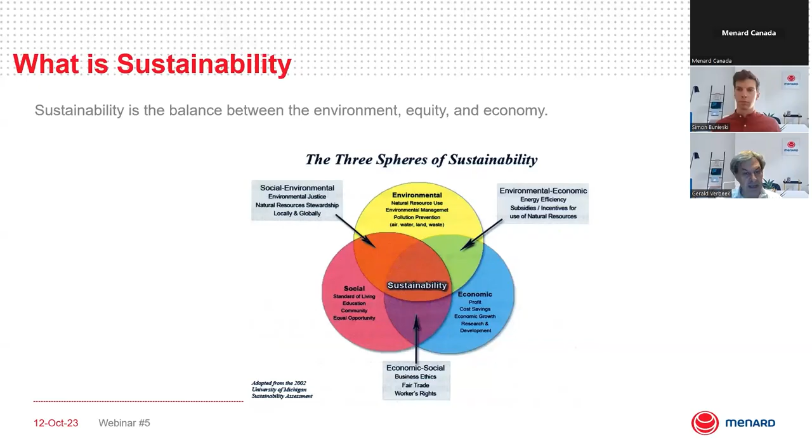To simplify it a little bit, you see that basically here you have the environmental protection, the social aspects, the economic aspects, and where those three aspects intersect, that is where you have sustainability. That is where you have a sustainable development going on.

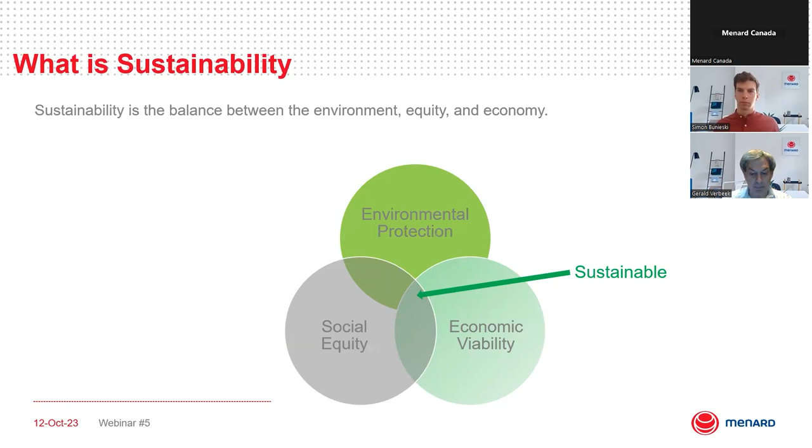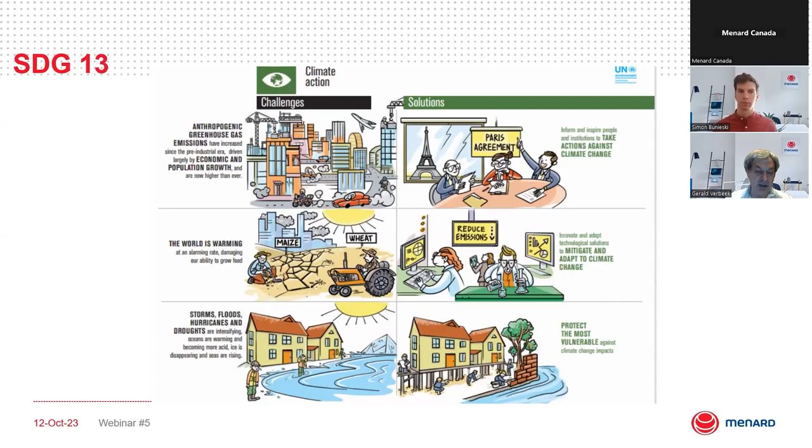That is why the Paris Agreement basically said, okay, we need to do something about those emissions to at least minimize the effects. I realize full well, and that's what I said at the very beginning, that there is no consensus among you as attendees, but I have to take the world at large, that what we're doing has an effect on climate.

Some people may say that the emissions really don't affect climate, that the reason you have climatological changes has nothing to do with what we're doing on Earth as human beings. So there are pros and cons, and I'm not here to try to convince you for one reason or the other.

But most of us, as you saw earlier at the results of the polls, are engineers. And what I would like you to do is accept that we may disagree, may have different opinions, but at the same time look at some data. As engineers, we always like correlations, and when we have a good correlation, we start to believe in this whole thing.

So let's look at the carbon dioxide levels in air going down about 800,000 years. What you can do with taking ice cores is analyze what the CO2 content in the air has been. You see that for the longest time, that varied somewhere between 180 and 300 parts per million. So yes, CO2 levels in the atmosphere change rather dramatically, 180 to 300 is about a factor of 2.

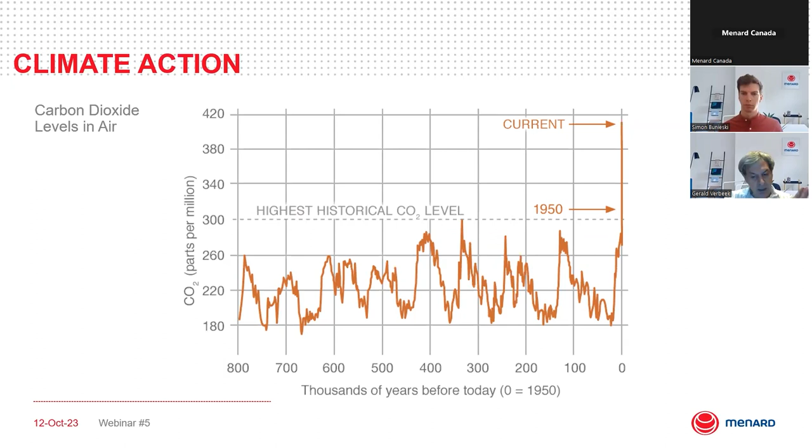And now we are in a period where we are in uncharted territories when it comes to CO2 levels. And it may also indicate that we're in uncharted territories when it comes to temperatures.

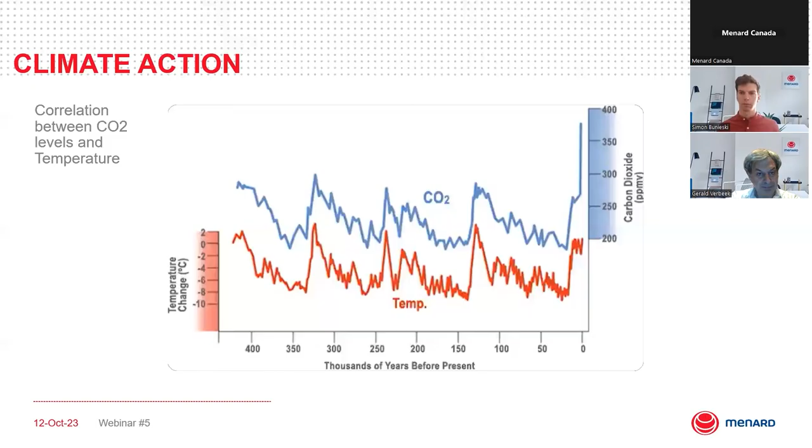Does it affect us? Well, when you look at what happened this year in Canada, we have had a tremendous amount of forest fires. Those forest fires were basically because of the drought conditions throughout Canada, which were a result of the climate action.

Here in the United States, we've had tremendous high temperatures in large parts of the country. But we also have seen that the results of the forest fires in Canada, the smoke and the particles in the air that came south across the border into the United States, affected us here in the United States as well. And it implies again that what happens in one country has an effect in another country.

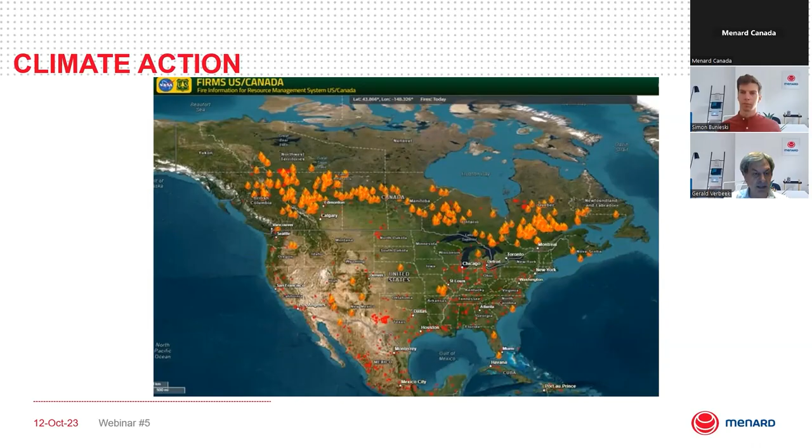And that's where I mentioned at the beginning that I was a Dutchman, because obviously, as I explained to you, the climate in Holland is largely affected by something that happens far, far away. So climate action is something that we, at least as engineers, should take seriously because of the correlation between the CO2 content and the temperature on Earth.

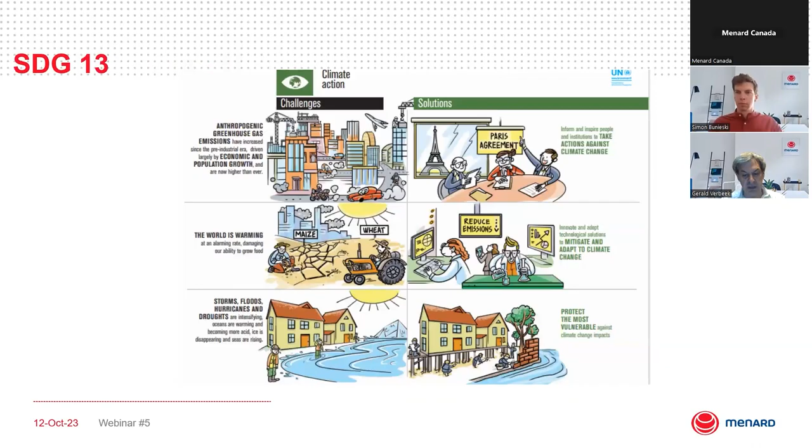When we look at this, you may wonder, of course CO2 content affects the temperature of the globe, but why would we do something about that in our industry? Why is it important that the construction industry is involved? What you see is that about 11% of the CO2 emissions come from building materials and construction. So our industry plays a major role in creating emissions into the atmosphere of CO2 and other greenhouse gases.

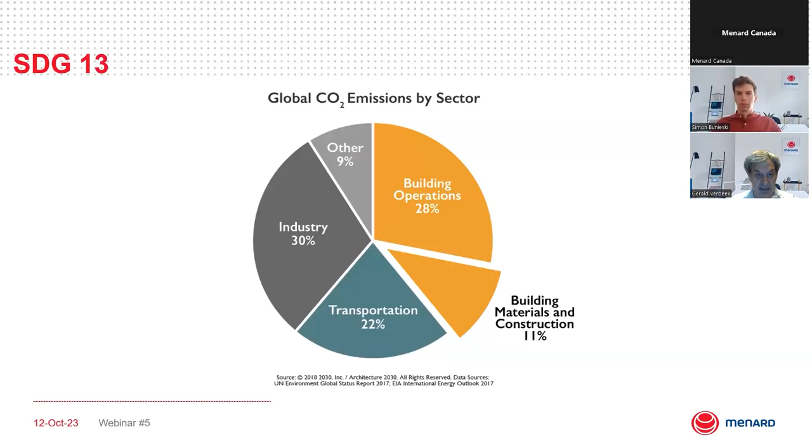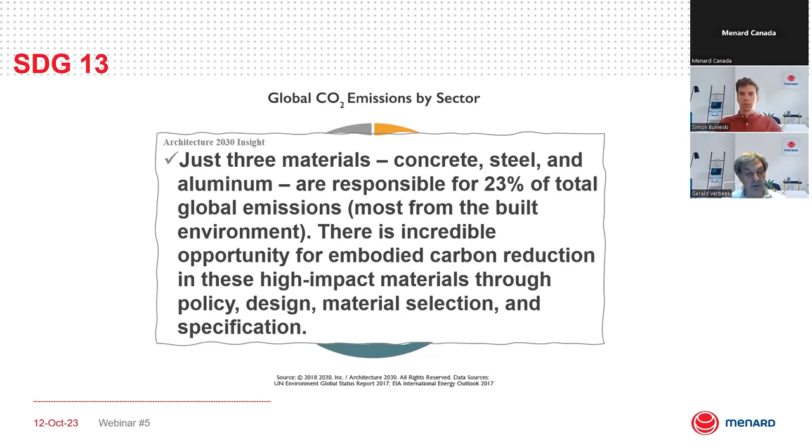You can go even one step further when you look at three materials: concrete, steel, and aluminum. They're responsible for about 23% of global emissions. Those are materials we use day in, day out in our industry. Foundations are often concrete piles or steel piles, and we have rebar, so those materials play a major role in creating emissions. That's why it's such an opportunity in our industry - not only because we generate a large percentage of emissions, but also because of the materials we use. If we start using them less and see an improvement, we can really affect what's happening.

So let's look a little bit at where we are. Here you see the building life cycle. It starts on the bottom left-hand side, where we start creating products that we then use to build a structure. Then we use that structure, and at the end of its lifetime we also need to make sure the structure is either destroyed, abandoned, or taken apart - whatever you want to call it. But there's this end-of-life stage, and hopefully we're able to recycle quite a few of the products.

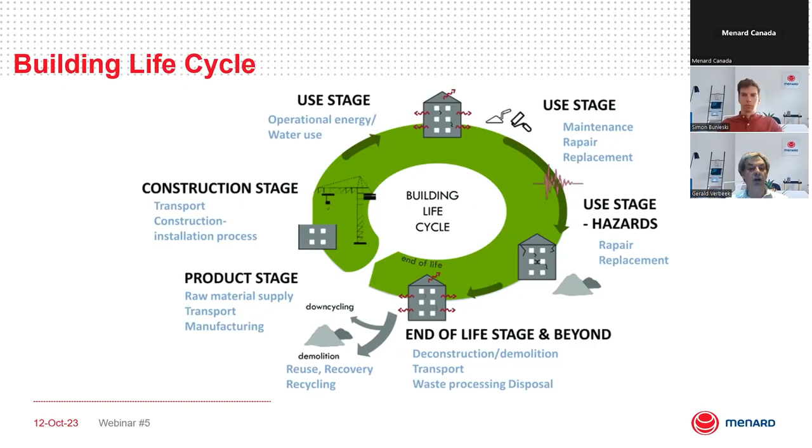Quite a few people would say, well, if we recycle what we used, we're doing pretty well. Up to a point that's true, but it would be even better if we avoid building, or if we do build, reduce the amount of what we're constructing, or substitute it with things that are more effective, more efficient, more sustainable. And if we really can't do any of that, we can compensate by taking other actions, for instance planting trees or doing other environmentally sound things.

For foundations, how can we do that? Let me give you a few examples. If we have a building and we reuse the foundation, we basically avoid having to build a new foundation. That's why, as chair of the conference on foundation decarbonization and reuse, that's something I really want to advocate.

But if we do have to build a foundation, if we use a more elaborate testing program, we can increase the resistance factors and therefore reduce the size of the foundations, coming up with a more sustainable solution. Or, what we're going to talk about today, instead of putting concrete and steel in the ground, we can do ground improvement and substitute that material for something more sustainable. So there are all kinds of things that at first sight you might think we cannot do in our industry, but we can really apply them throughout what we're doing.

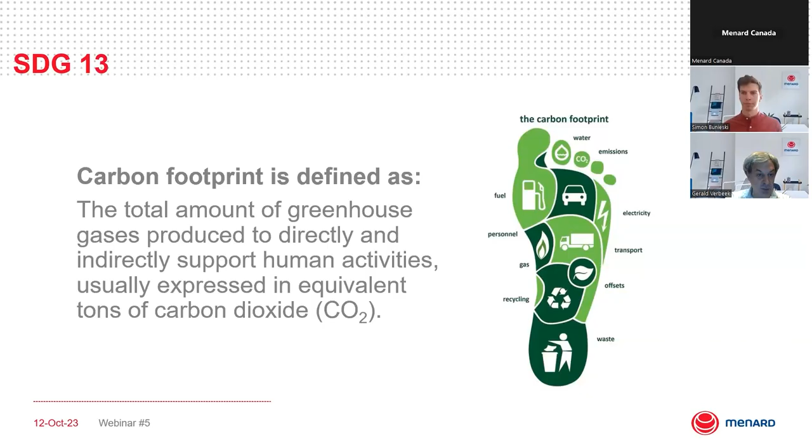The question then is, what is the carbon footprint of our industry? And if you go and look at that, the easy solution is a tool that we have developed together with EFFC and DFI, the carbon calculator.

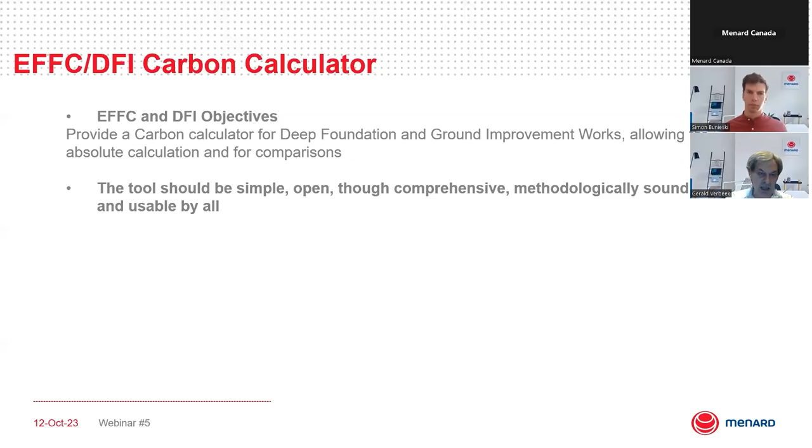It's a tool that is very simple, basically an open tool. You can use it, you can download it, as I showed you. It's a spreadsheet where you can enter all your data and get an indication of what your emissions are. And we take those emissions from all activities, from going to the job site with our staff, bringing equipment to the job site, creating the materials that we need there, and then putting the whole project together.

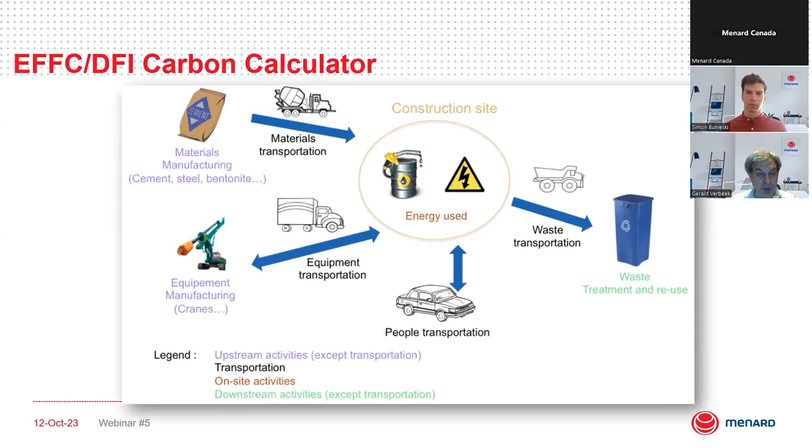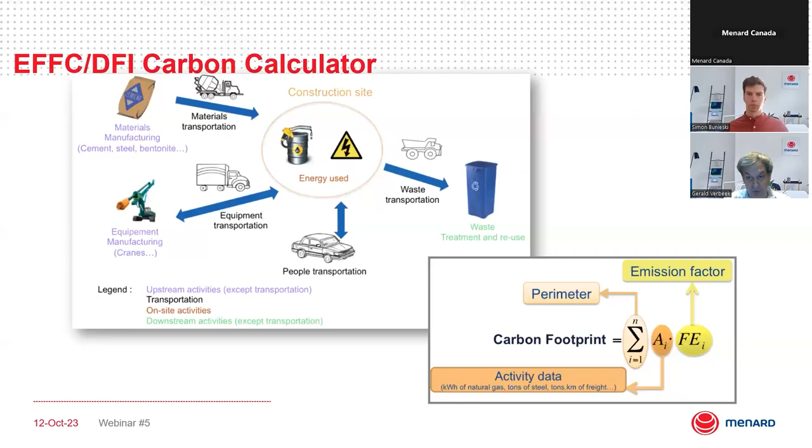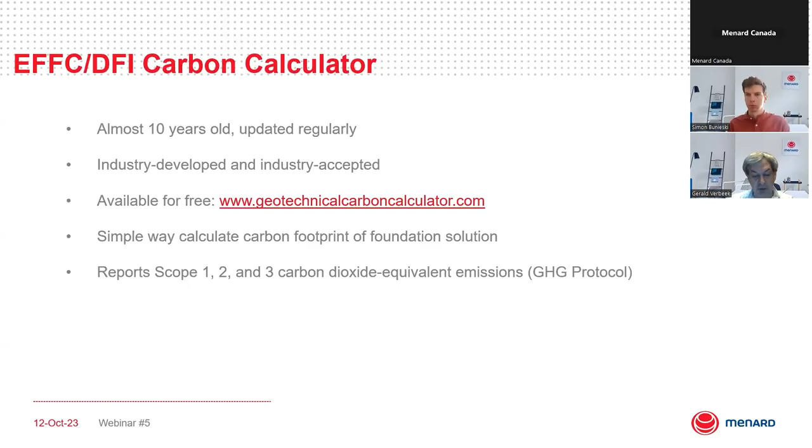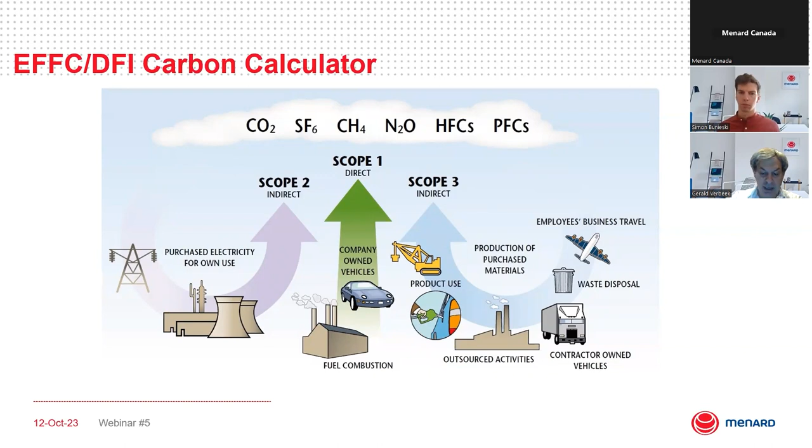What that carbon calculator allows you to do is come up with the complete scope of emissions: scope 1, 2, and 3. Scope 1 is basically the fuel consumption to bring staff to a job site. Scope 2 is the electricity we're using and other power applied on the site. And then scope 3, by far the largest part, is the emissions caused by generating the materials and putting everything together on the job site. That's what we need to focus on, because for most in our industry, the scope 3 contributions far outweigh scope 1 and scope 2.

But there's something else we need to look at. What you see here is the results of some analysis we've done with the carbon calculator, showing all kinds of different foundation types. We're not saying every foundation type has the same carbon emission level, but we're showing the contribution for the different foundation types, where it comes from materials, waste, or transport. You basically see that for most foundation types, the material component, the brownish part, is by far the largest component. So if we know what that material component is, and if we can reduce it, we automatically reduce the total emissions.

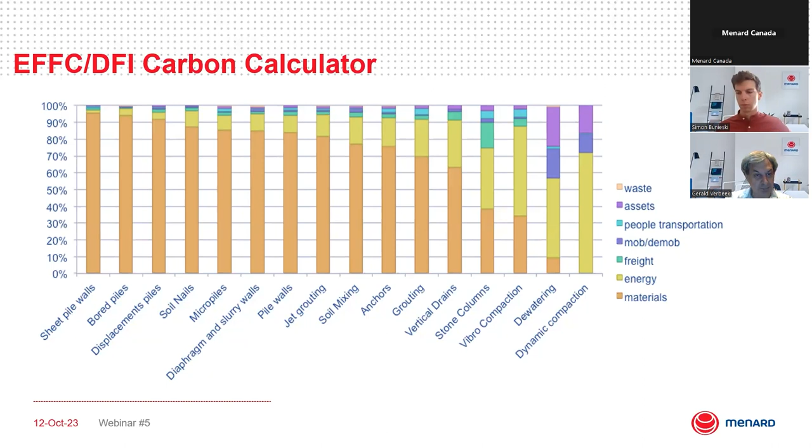But when you go farther to the right-hand side and come to ground improvement, you suddenly start seeing that since we don't add many materials, the situation changes quite drastically. Therefore, it's important that you understand the impact of a type of foundation. If you're using a concrete pile, that has a completely different impact than a ground improvement, and that's, after all, the topic of this presentation.

But also, I want to emphasize it's not just the Green Deal we're talking about. Last year, I moderated a webinar with DFI on sustainability, and I invited four executives of North American companies to participate and give their views on sustainability. One of those people on the panel was Seth Pearlman, CEO of Menard North America. He basically indicated that, listen, it's all fine if we're talking about sustainability, but unless it's a financial benefit, we really are not going to get anybody to step up to this whole thing.

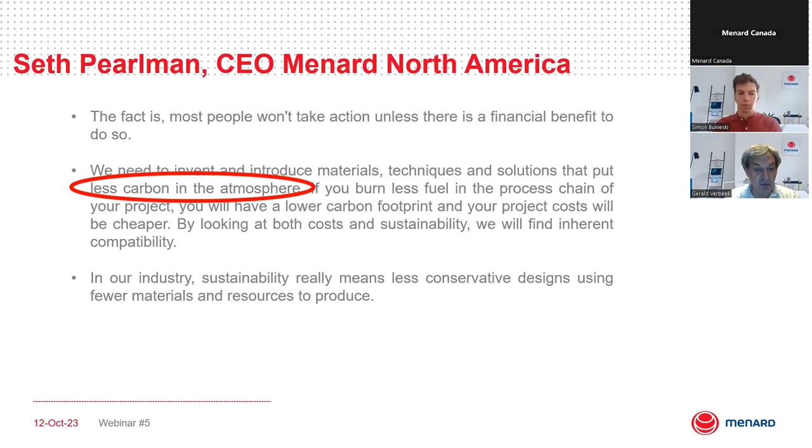At the same time, we need to use techniques and solutions that put less carbon in the atmosphere, as I pointed out earlier. One of the things this really means is that sustainability means using less conservative designs, using fewer materials and resources to produce. And what does this mean? Now, what is the next step? Well, that's to try something new. And I'll give you one example.

This is a case study that was put together for the DFI magazine not too long ago by Katie Costello from Isherwood. I'm more than happy to use that example, where we talk about the construction of a station in Toronto.

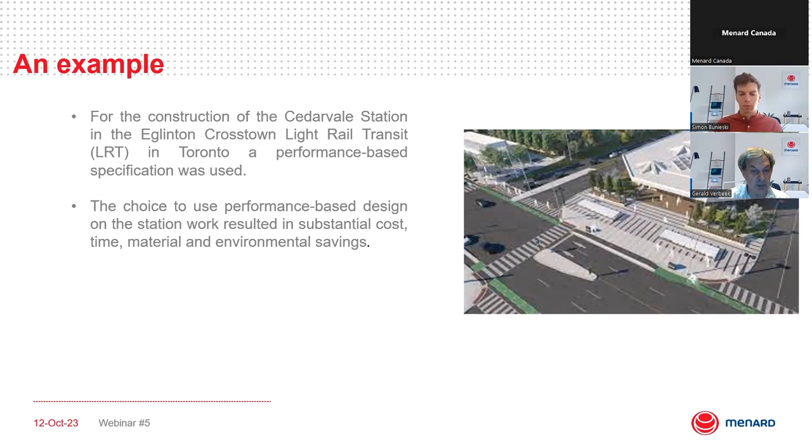The specification was not specifically defining what had to happen, but they gave a performance-based specification, which allowed the contractor to optimize the design to come up with a more sustainable solution for that production.

Using a carbon calculator, we came up with the emissions or the reduction in emissions, and then to clarify that impact, we used another tool from the Environmental Protection Agency in the United States: the greenhouse gas equivalency calculator. That basically allows you to come up with a very simple equivalent, because when we're talking about tons of CO2 emission reduction or addition, it's very hard to figure out what it really means and how it equates. With this calculator, you can come up with something like that.

In this project, the station in Toronto, we could reduce the emissions by 530 tons of CO2. And it basically shows you what the equivalent is — the energy that is used for 67 homes in one year.

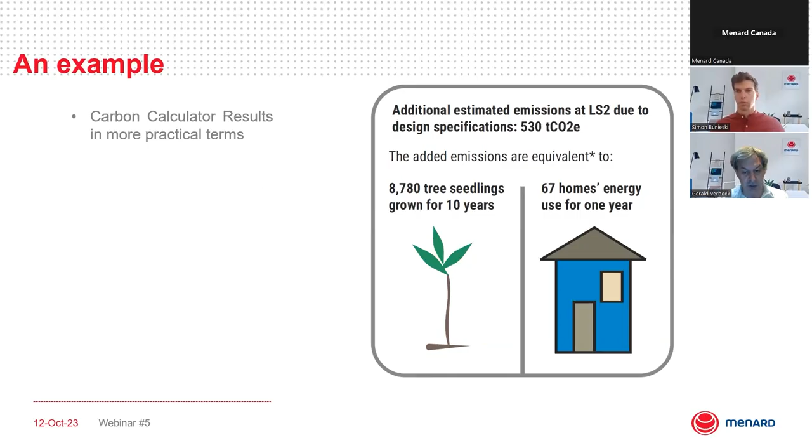With that, we can really show as an industry that we can do something. We can reduce the amount of materials, therefore reduce the carbon emissions, therefore have a positive impact on the temperature of the Earth, but we can also present it in terms that are more easily understood by our audience. So with that, I think I've given you an introduction of what sustainability is all about, why it makes sense, and Simon will take it from here.

If you cannot reduce, then substitute. If you cannot substitute, then really go compensate. That's really the last resort that you have. But the approach is we don't want to be at compensate first — we want to just go step by step.

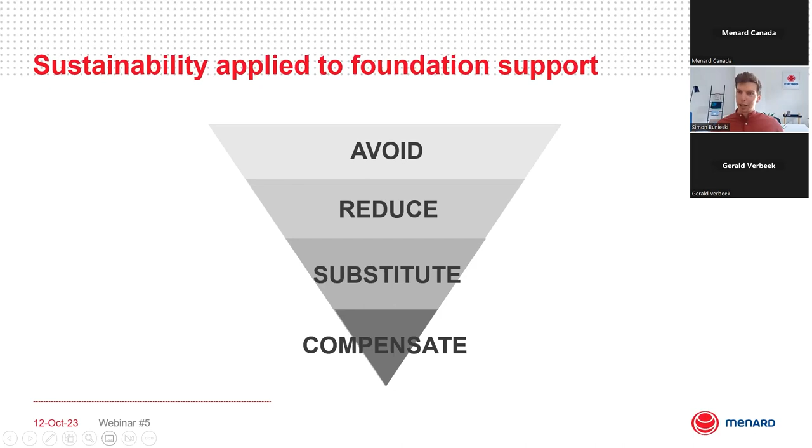The approach I wanted to share with you today is to take different points of view from different stakeholders on a construction project and see what it means in practice. So if you look at it as an owner: avoid, obviously, means avoid construction — do not build, which is not always possible. If you want to reduce it, you should see it as build only what is necessary.

Substitute is, you may want at some point revisit some architectural choices if you have the ability to, because some panels or specific materials you choose may not be the least carbon intensive — there could be some less carbon intensive options. If you cannot, then compensate — plant trees. This is more of a side note than a real action, something we want to avoid as much as possible and go with the further options instead.

As a consultant or as an engineer: avoid. What can we avoid except loads? No load is obviously the best approach. If we cannot, then let's lower the design load.

Sometimes we see that some loads are maybe overestimated because the project is very early or because there are a lot of unknowns. Maybe we should take the time to go more in-depth and try to lower these values, because that will have a consequence on all the other trades involved in the project.

Substitute is about specifying lower carbon intensive alternates to be used on the project, because at that level of involvement there's the possibility to provide clear specification on substitution. Plant trees, again, is more of a running topic than anything else.

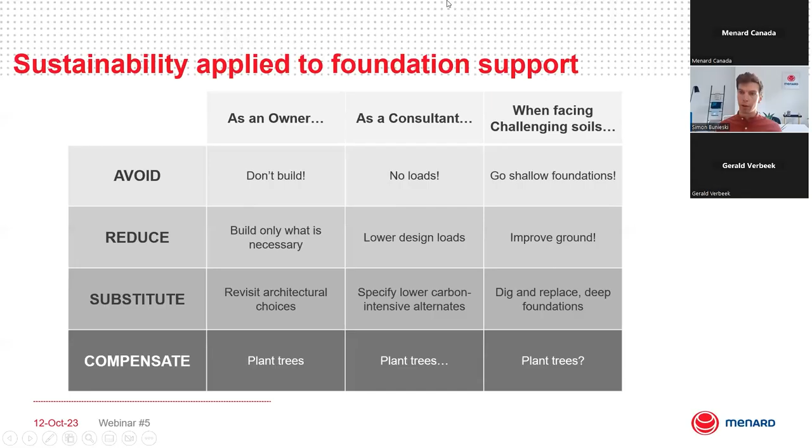If you want to reduce challenging soils, what does it mean? You need to improve them — that's what we call ground improvement. If you cannot reduce this challenging soil, then you have to substitute them, with options like digging and replacing the soil, or substituting with concrete that you don't design around — and that would be deep foundations.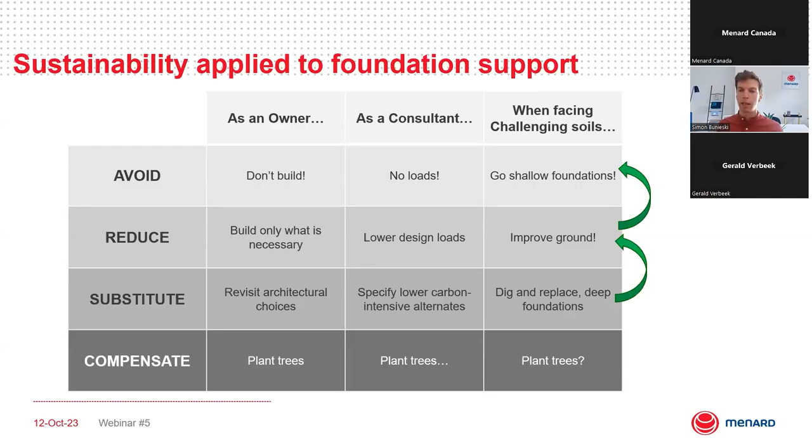So that's what we wanted to elaborate on, and then say, if we go for more value engineering, then there would be less ton CO2 equivalent. And how do we measure that on a ground improvement project?

Bill mentioned the EFFC DFI carbon calculator, which is a great tool we've been using for the last couple of years, and keep using to compute absolute values of ton CO2 equivalent, the metric showing what is your carbon footprint, or embodied carbon, of your project. It is split into 7 different categories, which are very clear from a contractor point of view, but maybe less clear from a consultant or engineer point of view.

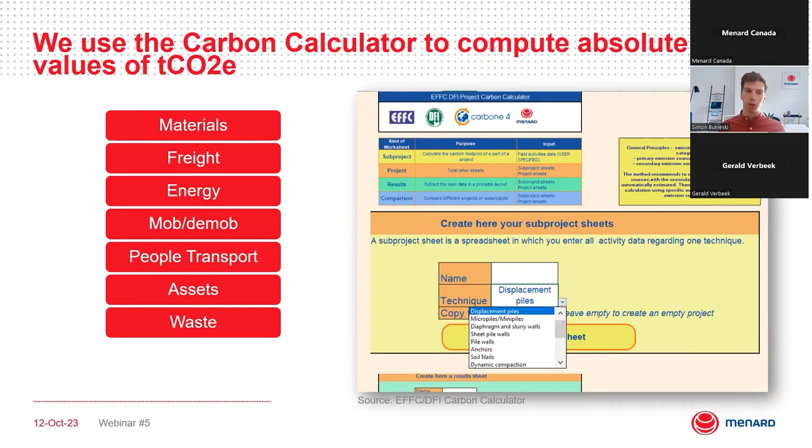You have material, freight, energy, mob demob of your equipment, people transportation, assets, and waste. So on a classic project, what does it mean?

Energy and assets are obviously the main component. This is a construction project with controlled modulus columns, and clearly you can see that any ancillary equipment, the main equipment, the pump for instance, are definitely the energy and the assets. People transportation is our crew. There is nothing we could do with our crews, and we are not there yet to go without them. Let's not reduce them.

The third aspect, obviously, is the freight - it's what we have to move on site. Then there is everything about the material, which is the concrete and the rebars in that specific case. And then there is the waste.

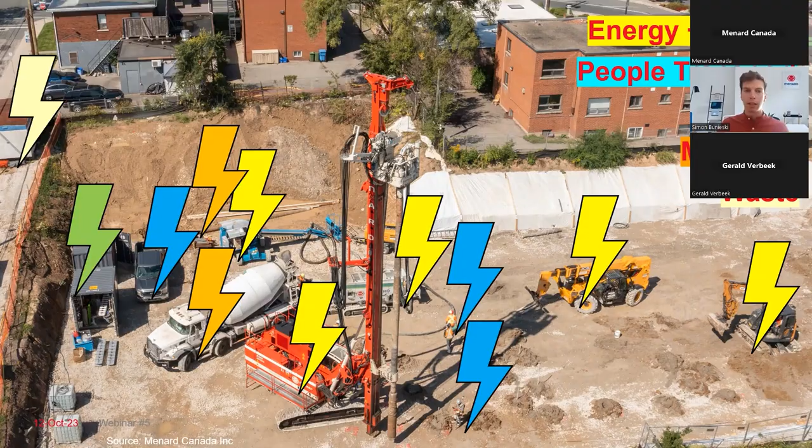Once we have these quantities, part of our quality control daily procedure, we have to rely on local emission factors. And when I say local, this is key. Emission factors are what you multiply your quantity by to get your ton CO2 equivalent. If we are using emission factors that are too countrywide or not specific to your area, what you measure is not relevant enough to your local component.

That's why this example from Concrete BC, for a BC project - every province in Canada has a Ready Mix Association that publishes baselines for a given concrete mix, let's say 20 MPa concrete, giving a baseline of global warming potential, GWP. So concrete suppliers are working on their mixes to lower these numbers, but these publicly available baselines are a good indicator of where you stand when you order such mixes.

The best is also to rely on environmental product declarations, or EPDs, that these suppliers can provide, which are very specific to your project. These numbers can be input into your carbon calculator, making your total value of embodied carbon as precise as possible.

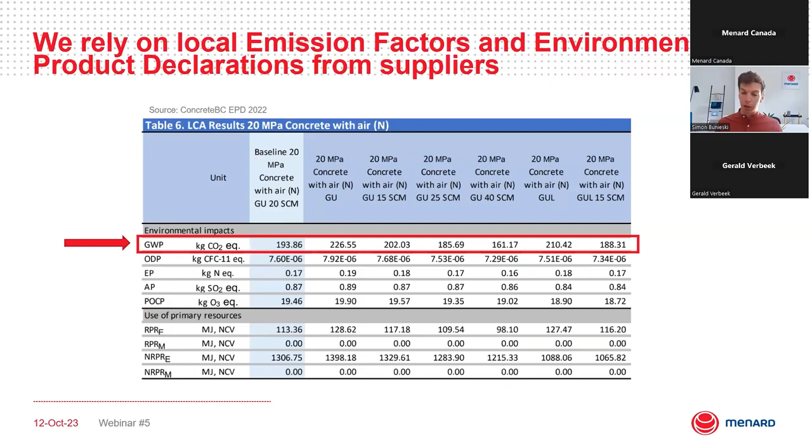So we did the exercise on 110 projects, ground improvement projects that took place in Canada between 2020 and 2022, and we were showing what we got as a result.

So more value engineering, less CO2, but less than what? The key question is the baseline. So among these projects we looked at, let's take one example of an industrial project that took place in Ontario - it's a warehouse building.

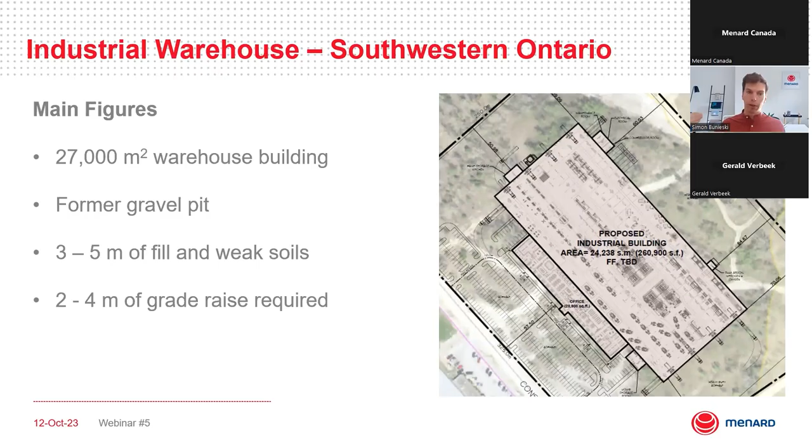It used to be a gravel pit. There are 3 to 5 meters of fill and poor soils. And on top of that, the owner wanted to have a grade raise. So the initial solution was to go for a dig and replace option.

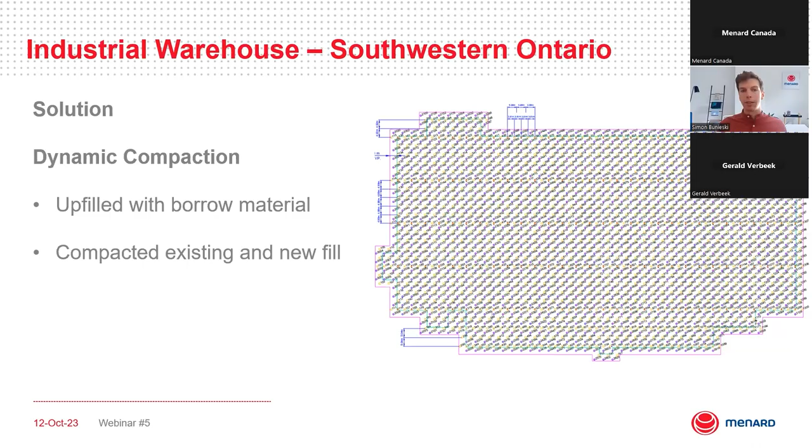What we suggested was to go for a dynamic compaction option, which you may have heard of, or otherwise you can refer to the previous webinar recordings. The dynamic compaction option basically allowed the client to fill with borrowed material, and we compacted the existing and new fill at the same time to reach a 200 kPa SLS bearing capacity. So in terms of carbon, what's the impact?

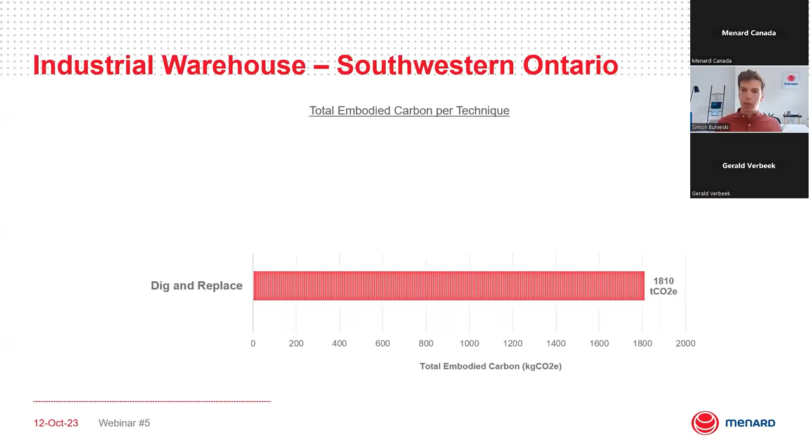And we can talk about the financial impact as well. The dig and replace option had a total embodied carbon of around 1,800 tons CO2 equivalent when you add all the different categories on the DFI tool, as we mentioned.

If we look at the dynamic compaction alternative, taking into account the people, transport, all the categories we mentioned, we were close to one eighth of the final value. And this is one given project.

So how can we generalize that information? Because as a contractor, Menard has all the information about the different categories provided in the carbon calculator. There's a great webinar I encourage you to go through that took place last month with the DFI, mostly about how to use a carbon calculator for consultants.

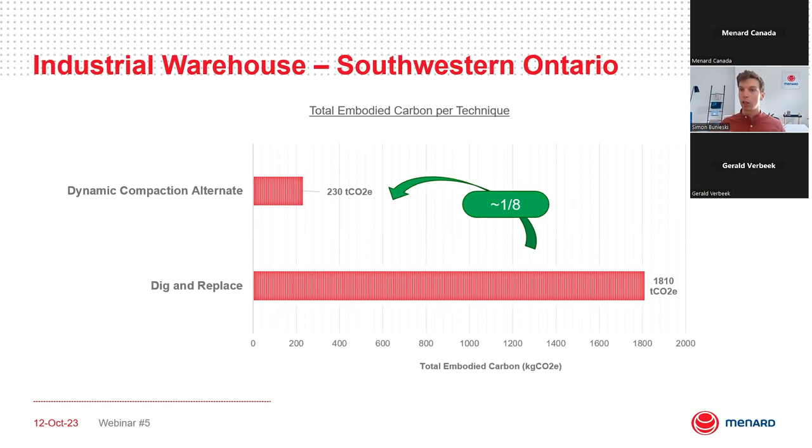So we did this exercise and thought, how can we generalize, or at least have an option to assess the embodied carbon of a ground improvement technique and go for absolute values, because this is what we want to target. We know embodied carbon is a function of the depth of treatment and the soil conditions, which you usually know. It's a function of the ground improvement technique you will use, but it's also a function of the above-surface structure.

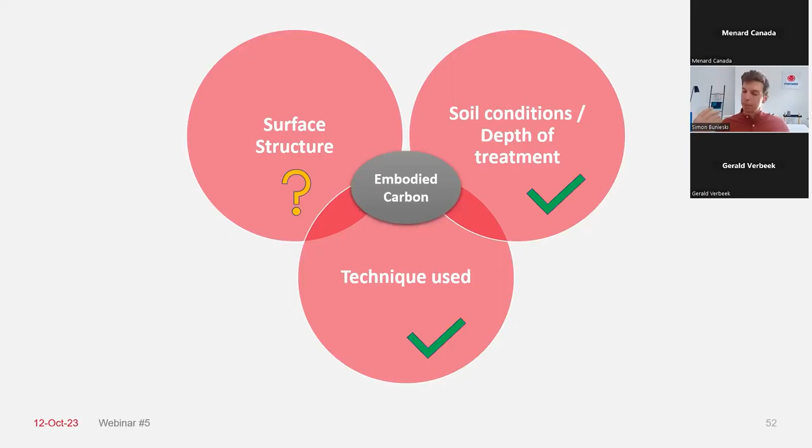And that's something that makes it hard to compare from one project to the other. So we looked at all these 100 projects and tried to provide some trends. Our approach was to look at the total embodied carbon for different depths of treatment and types of techniques, then divide it by the square meters of gross floor area, the total area of your building.

So if you have a residential building with multiple stories, you would multiply the number of stories by the area of each story. If you have an industrial building that is one story, it would be almost your building footprint.

The numbers we use are from a chart in an article we presented last week at the CGS conference in Saskatoon. We show that as early as possible in the project, if you have an idea of the type of technique - controlled modulus column, which is concrete-based, dynamic compaction, RIC rapid impact compaction, vertical drains, or stone columns - with different depth treatment buckets, you're able to have an idea of your carbon budget for the ground improvement technique.

Obviously the range isn't highly precise because we're looking at 100 projects. We wanted to provide these numbers for the consulting team to have a first idea of the carbon budget of a ground improvement solution and compare that with another alternative possible for that project, to go for the less carbon intensive option.

It's interesting to notice that for a concrete-based method like controlled modulus column at 15-plus meters of treatment, you have approximately 30 kilograms CO2 equivalent per square meter. But if you look at the equivalent with an aggregate-based solution, stone columns - the SC column here - for the equivalent depth of treatment, you get higher values of kilogram CO2 equivalent per square meter.

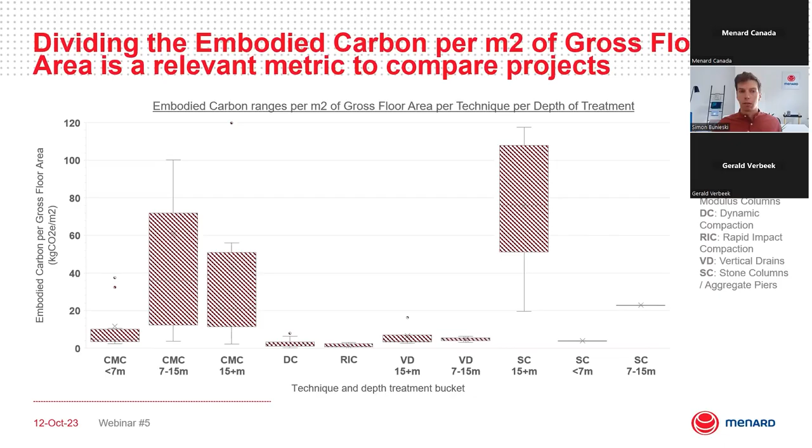This is our baseline, and it comes from the distance of the quarry and the multiple trucks that have to come. We thought having a well-spread set of techniques and different treatments, this graph shows something, and it's our baseline for us to reduce even more. How can we do better than that baseline? Because that was the last two years.

If we come back to this grid, as a ground improvement contractor, what can we do? With the range of techniques we have, how can we avoid emissions? Let's not use material, like Gerald was saying. If there's a possibility to go for a technique without any additional material, let's go for it, because the carbon impact will be lower. That's the example we saw.

Can we reduce our scope? Obviously we can, if we optimize our design, get more testing, and take the time to optimize and reduce that value. Can we substitute? That's our third option.

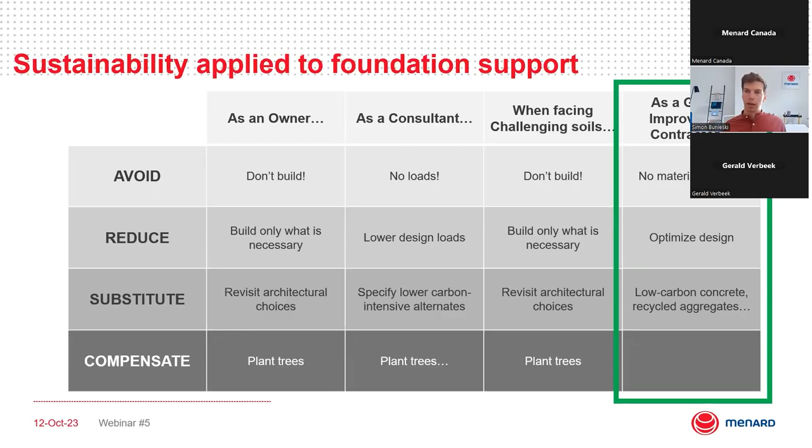If we look at all the options available when we optimize our design, we can go for recycled aggregates, we can go for low carbon concrete. This is where the relationship with our suppliers is key to lower our impact. And we would not plant trees. So this graph is similar to the one Gerald presented in the carbon calculator.

It's based on our 100 projects. When we look at the different techniques, what we want to do is focus on the main sources of embodied carbon for different techniques. For controlled modulus columns, we look specifically at the materials - that's the graph on the right-hand side. For dynamic compaction, obviously it's about the fuel - having more fuel-efficient machines on site, working on idling time, et cetera.

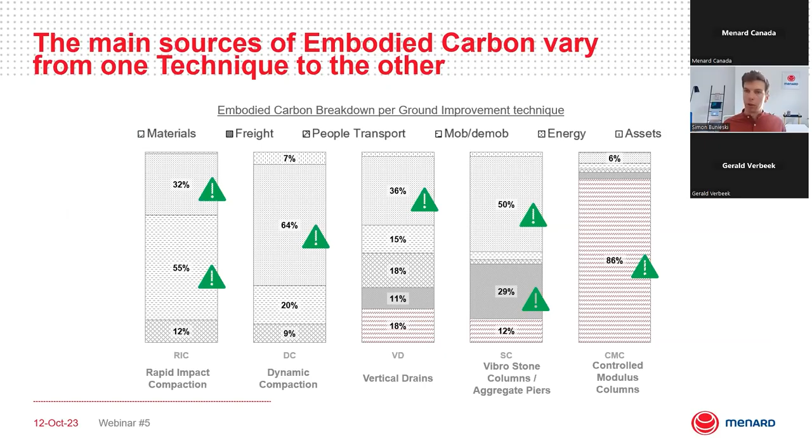We wanted to show you a practical example of a project. It's a residential project this time, a 5-story residential building with underground parking. Nothing too specific - it used to sit on a former landfill, and we had 15 to 20 meters of very soft clay conditions here.

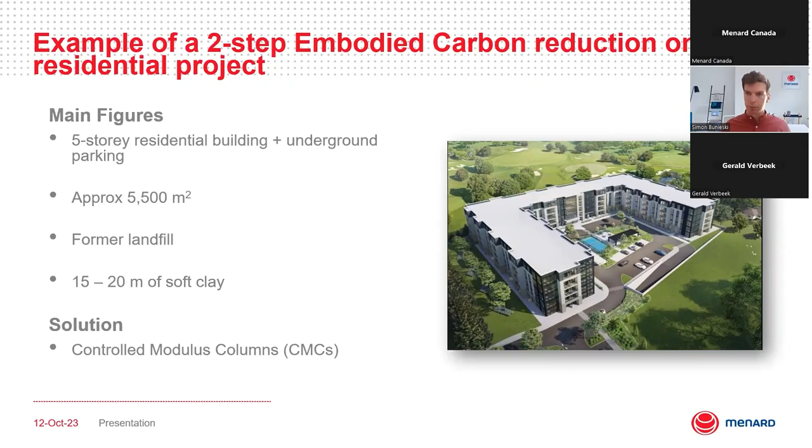The solution here was to go for controlled modulus columns, which was a cost-effective solution for the client, but we also wanted to push the exercise a bit beyond our classic approach and evaluate our baseline there, and see how we can apply the avoid, reduce, substitute logic to that specific project.

So this is a real project that took place. We are talking about the footing support here. Our baseline for the footing support was 900 tons CO2 equivalent. Our second step was to go with the client, discuss with the development team, optimize, do more load tests, and we were able to reduce our carbon footprint by around 5% for the same scope.

Then we talked to our suppliers to see if there were options for lower carbon materials. That's the substitute approach, and that brings us down further from the 900. So from 900 tons, we were able to go down to 485 tons CO2 equivalent.

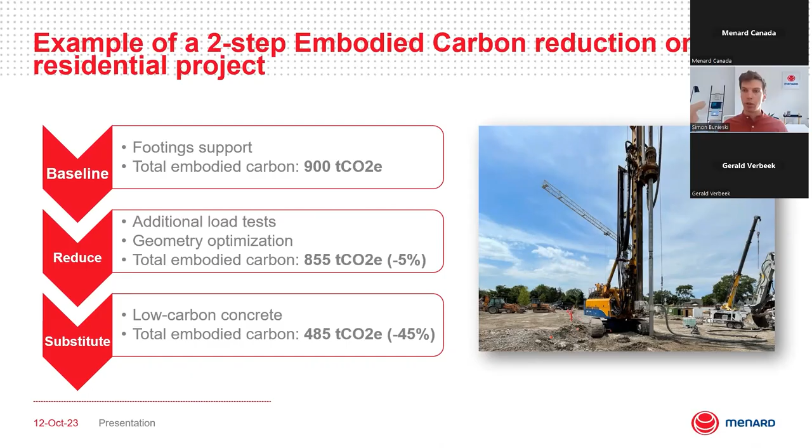That's the same approach Gerald showed for the subway station in Toronto, where there was this exact same approach that, as a contractor, you can go through, or as a consultant, make sure your contractor is going through the same steps. So in the end, more value engineering definitely means less tons of CO2 equivalent. It's also less dollars, it's also less time, and it's also faster. As Gerald likes to say, and we prepared that webinar, it simply makes sense as is.

So let's conclude on what we've seen. Starting with a very wide approach to sustainability, then diving a bit more into construction, into foundation support, and now into ground improvement, basically the carbon footprint of foundation support. The avoid, reduce, substitute strategy - I also include compensate here - is key if we want to work towards more sustainable construction projects. This is something that we as owners, as consultants, as architects, as contractors, should keep in mind wherever and whatever project we start.

The EFFC DFI carbon calculator is really helpful in our field, geotechnical works, to get absolute values of total embodied carbon. If you run the analysis at scale - we did this exercise on 100+ projects - we were able to provide orders of magnitude of absolute embodied carbon for ground improvement.

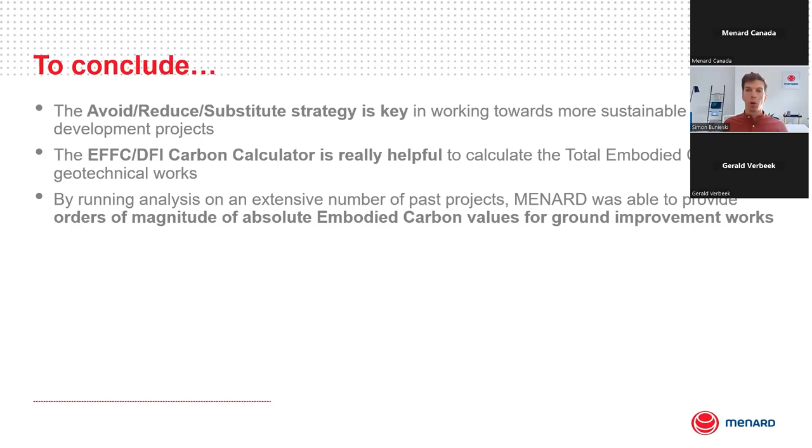We publish these values because we want to be challenged on them. We want these values to be used for assessment as early as possible in the development cycle, to be able to have an idea of what's the embodied carbon budget for the foundation support. Because this is where we're going - this is where the legislation and a lot of cities are heading at the moment.

But this is not enough, and that's why, with Menard's less-is-more approach, we are challenging ourselves on a day-to-day basis to go beyond these values, which are our baseline, and be able to offer always the most sustainable foundation support option. Sometimes it is not ground improvement, and we are happy to provide that advice to our clients. And sometimes we have to go with a substitute - you have to go for deeper foundations.

But whenever there is an option to go for lower foundation, that's where, with the tool that we talked about, we believe we have an impact on this topic. Thank you very much, everyone.

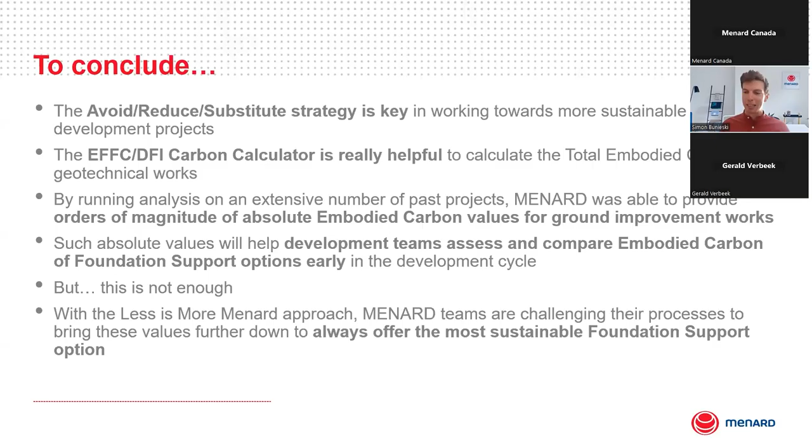Before we do that, Simon, let me jump in and give the audience two more items as food for thought. First, when you walk around, you walk on soil - that's the normal foundation we utilize. When we talk about foundation reuse, it doesn't mean the foundation you have is always perfectly adequate. Sometimes you need to do some improvement. But what we really need to start thinking about is, why do you take the basic foundation that's already there, the soil that's already there, and replace it entirely with concrete or steel? Why not start thinking about doing ground improvements, thereby reusing the foundation you already have, and come up with a more sustainable, more effective, more efficient, more cost-effective solution.

That's number one. The second thing I want to talk about briefly is reducing your foundation. We all know that when putting a structure subsurface, you have to deal with site variability - soils vary on a job site from one location to another. If you do a very limited site investigation, you don't have a good idea of this site variability, and you end up with cost overruns or claims later on. What I find intriguing is there's never enough money to do more elaborate soil investigations up front. People say that's not necessary, but there's always money - even more than what would be required for extensive site investigation - to address the claims and cost overruns. If we were to go to a more extensive site investigation up front, it would allow us to minimize risks, which is beneficial to project cost, give us a much better idea of what's really required, and allow us to increase the resistance factor, getting a much more cost-effective design. So again, lower cost, and a more sustainable approach.